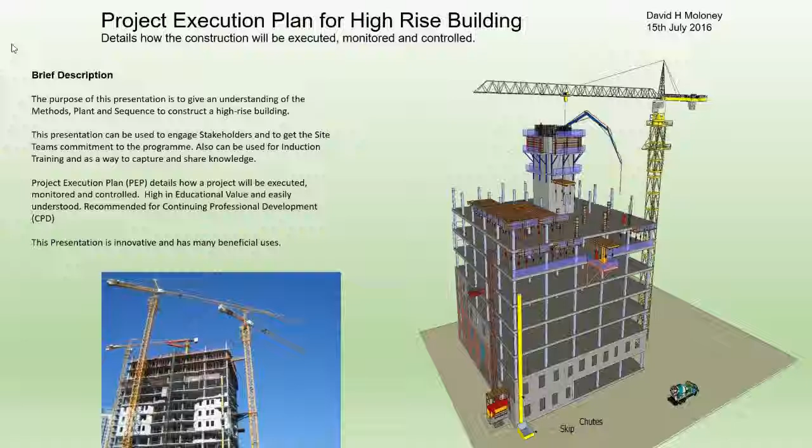Project execution plan for high-rise building. This project execution plan details how a high-rise building is constructed, and how the construction is monitored and controlled.

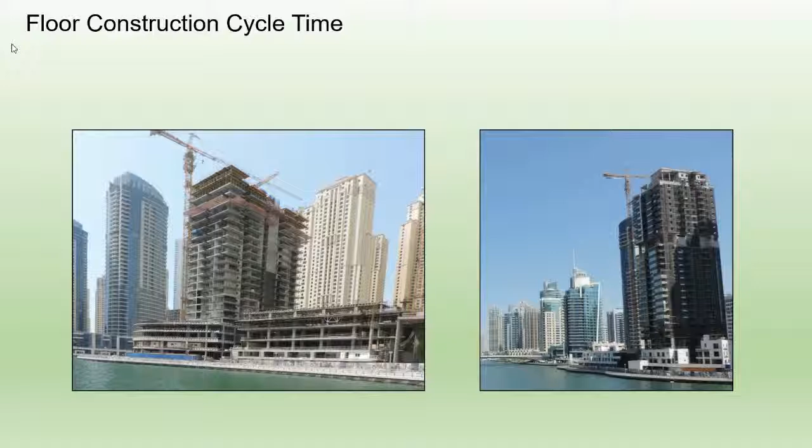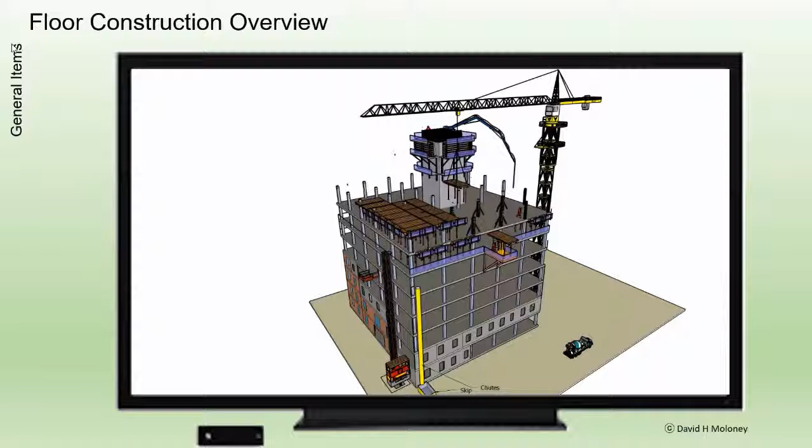Floor construction. Cycle times and program. The floor construction cycle time is 7 working days. Formwork types.

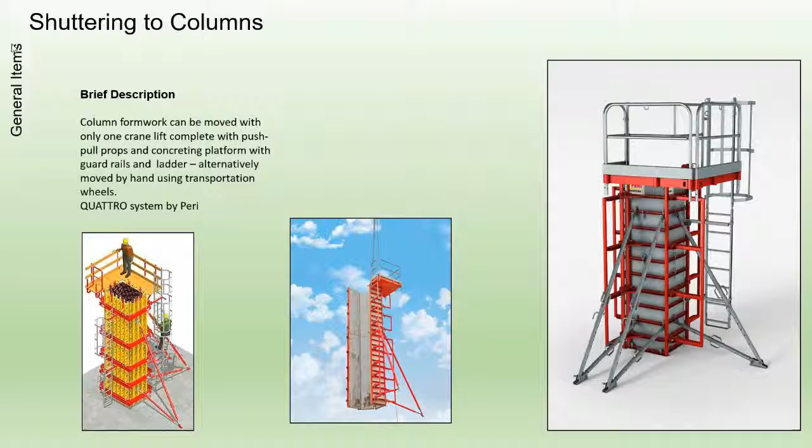Columns. Column formwork can be moved with only one crane lift, complete with push-pull props and concreting platform with guardrails and ladder. Alternatively, can be moved by hand using transportation wheels.

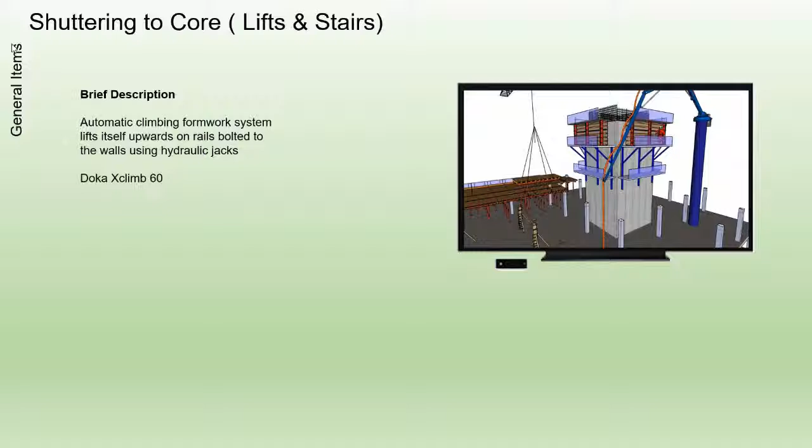Core walls. Climbing formwork system lifts itself upwards on rails bolted to the walls using hydraulic jacks.

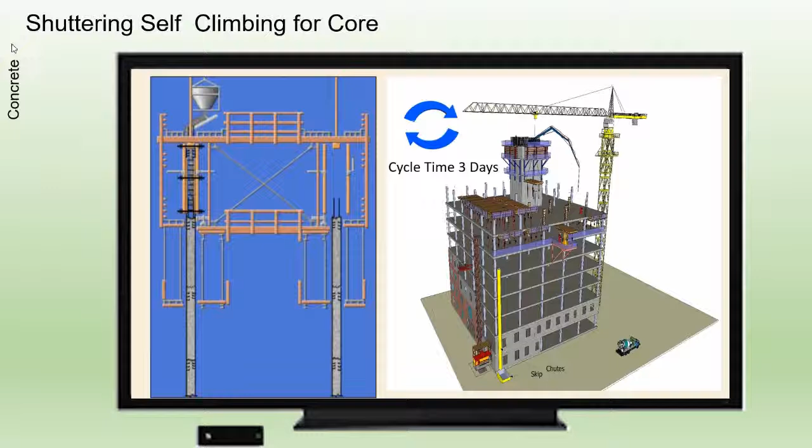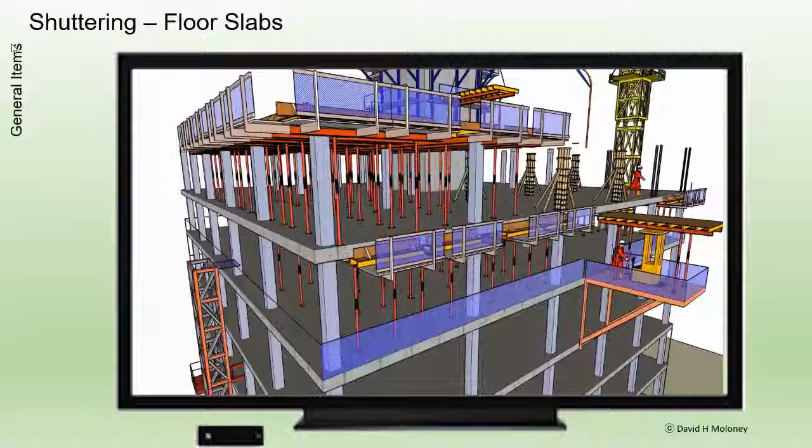Floor slabs. Table forms are pre-assembled formwork and falsework units that are moved horizontally on wheels or with a trolley and moved vertically from floor to floor by crane or by a lift fixed to the outside of the building. Formwork for stairs.

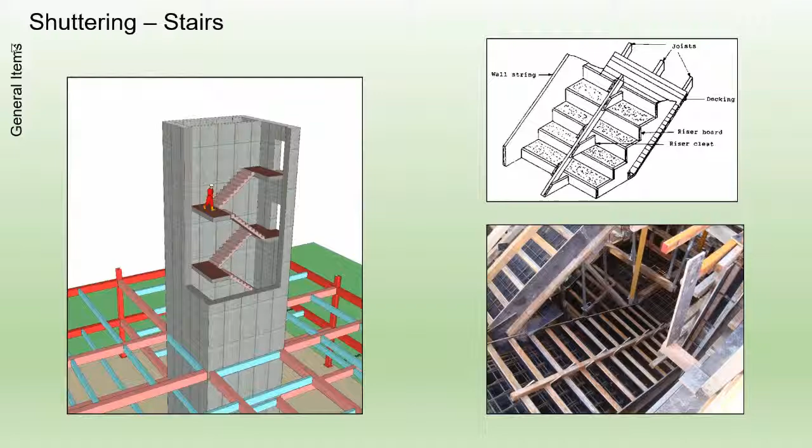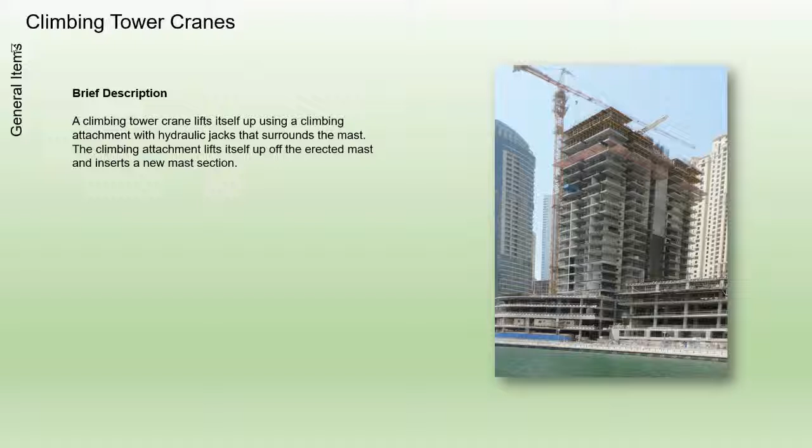Main construction equipment and plant. Tower cranes. A climbing tower crane lifts itself up using a climbing attachment with hydraulic jacks that surrounds the mast. The climbing attachment lifts itself and the top of the crane up, off the erected mast and inserts a new mast section. Above a certain height, the crane mast is anchored to the building using tie collars.

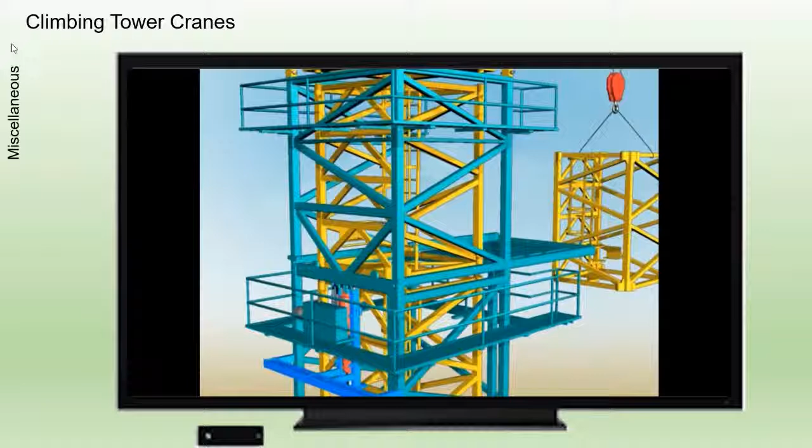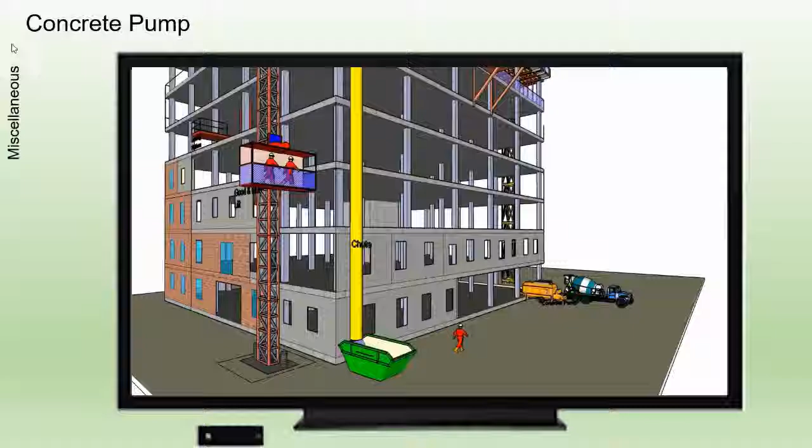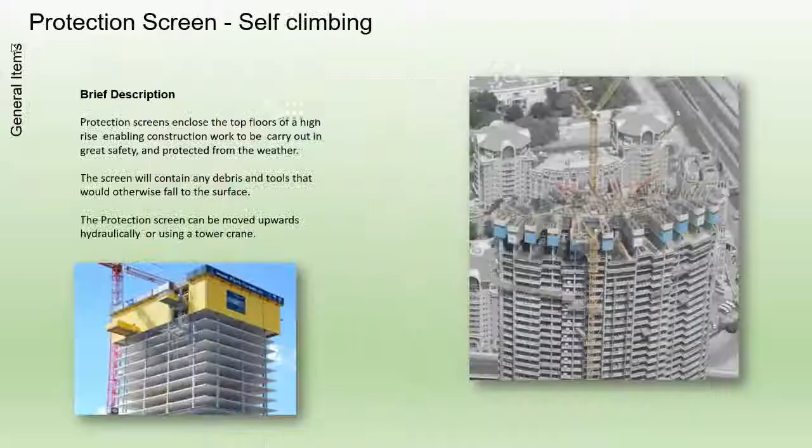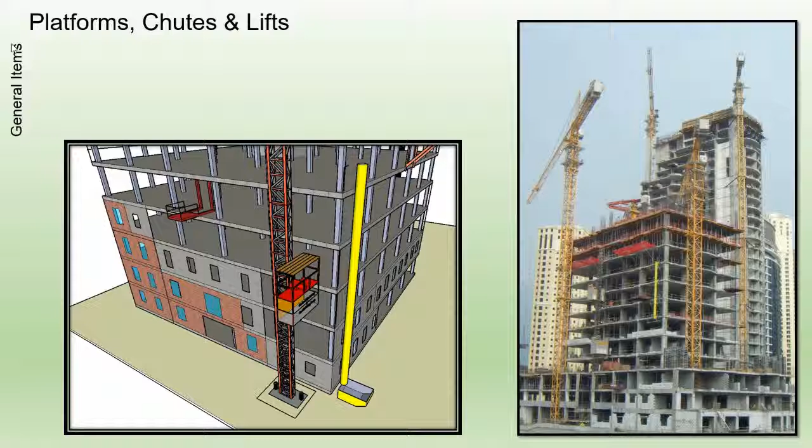Platforms, chutes and lifts. Cantilever loading platforms are used to move materials on and off floors with a tower crane. Chutes are used to move waste from various floors to skips at ground level. Passenger and goods lifts are used to move workers and materials and equipment vertically.

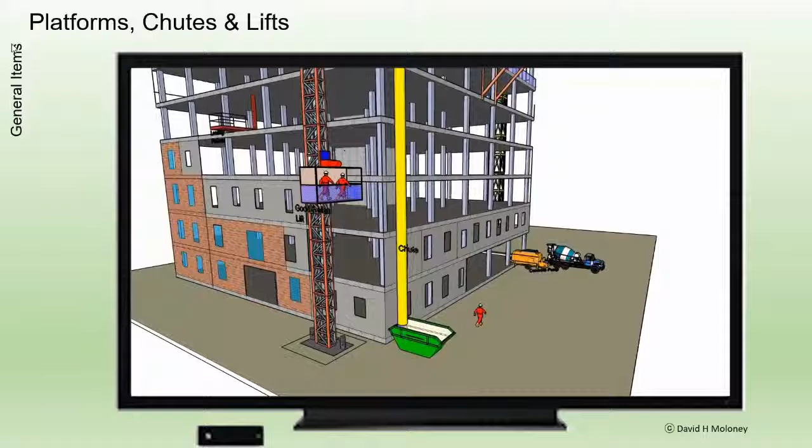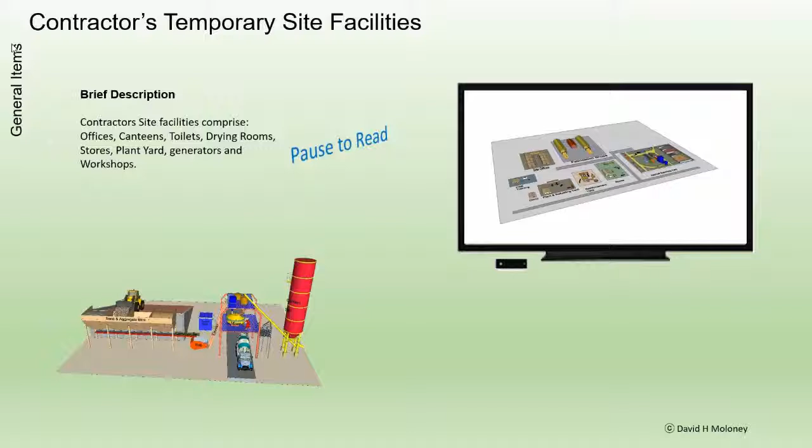Contractors' site facilities. Contractors' site facilities comprise offices, canteens, toilets, drying rooms, stores, plant yard, generators, and workshops.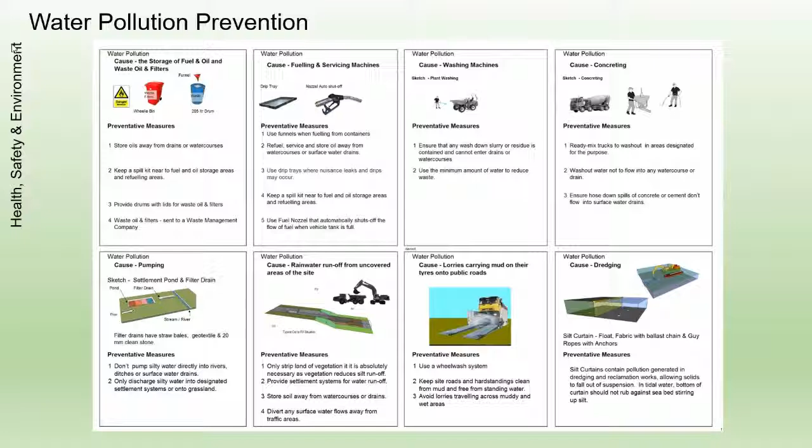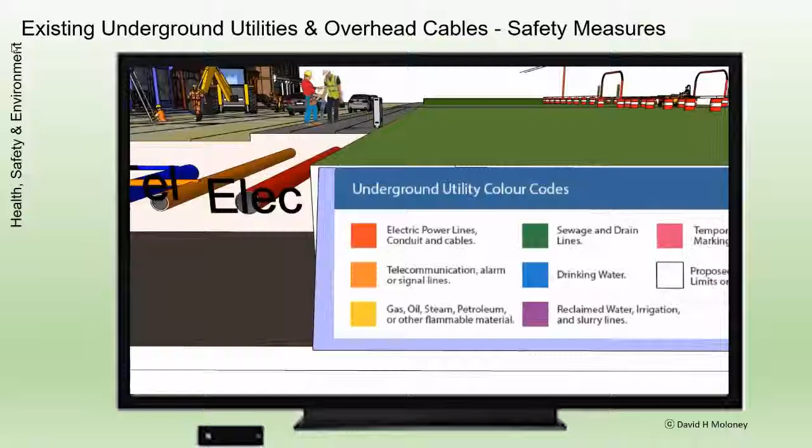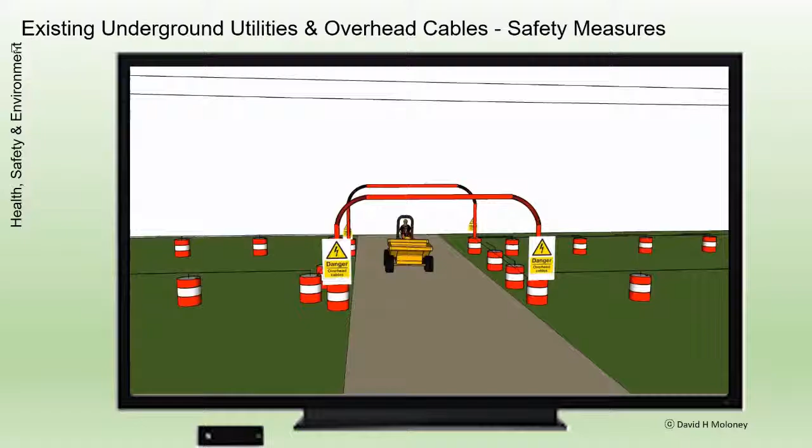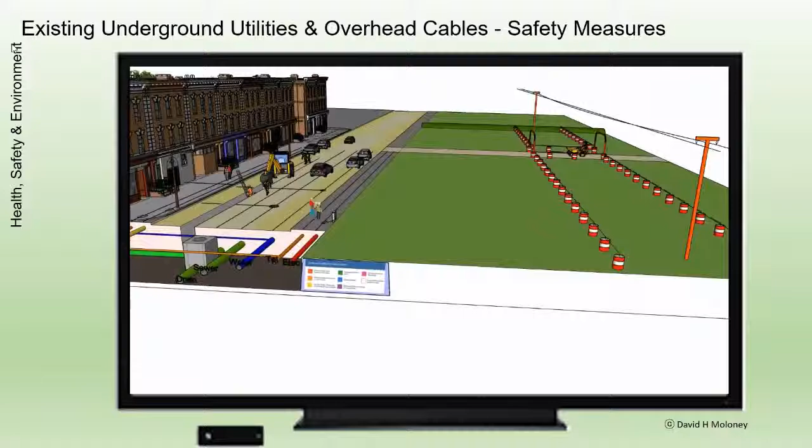Excavation safety. Before digging, establish the location and route of underground utilities. Measures when crossing under overhead cables. Safety measures for trench excavation.

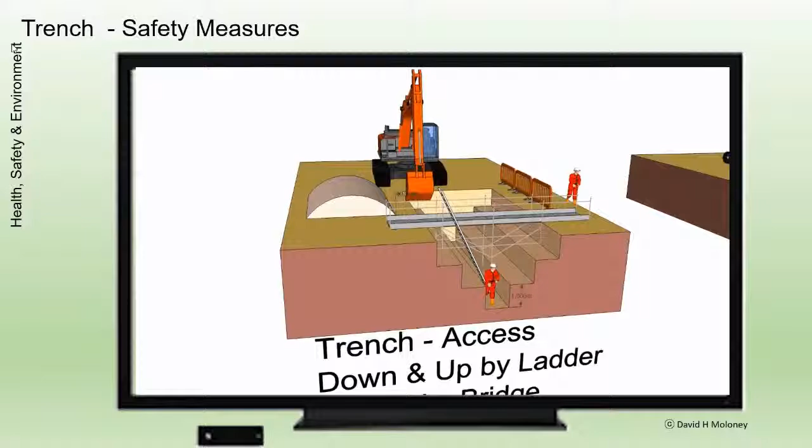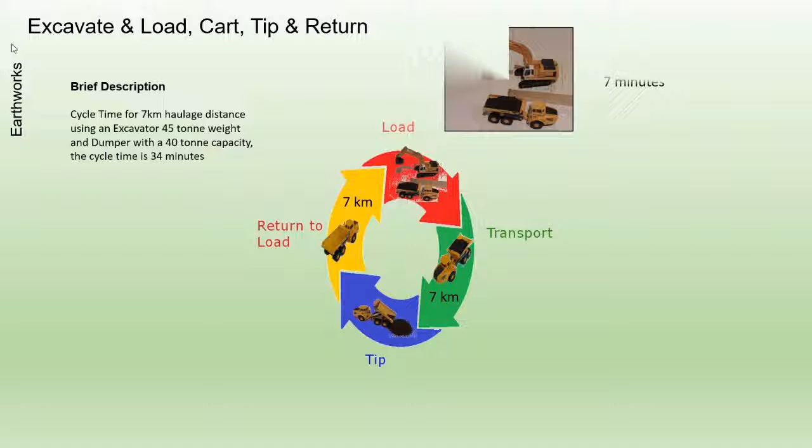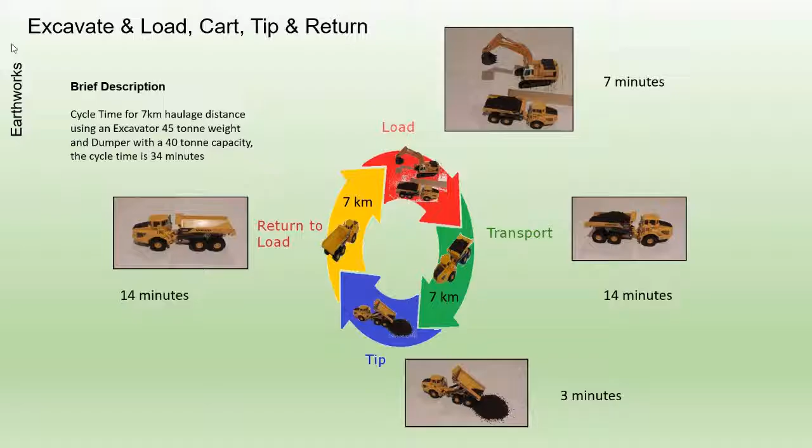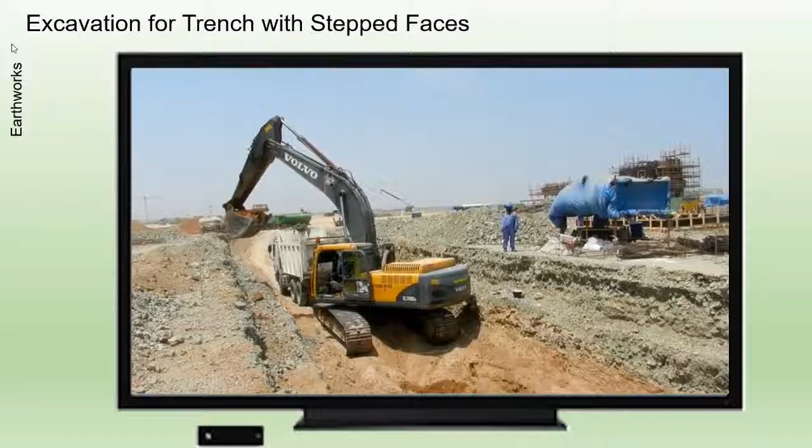Earthworks. Muck shifting cycle times. Excavation of trench with stepped faces. Excavation of trench with sloping faces.

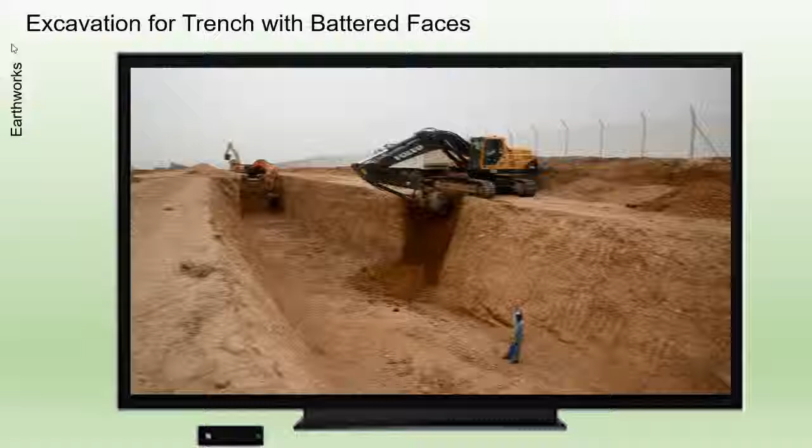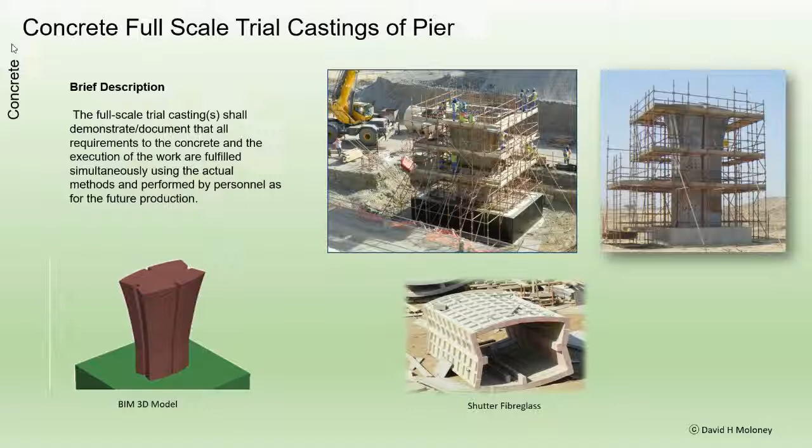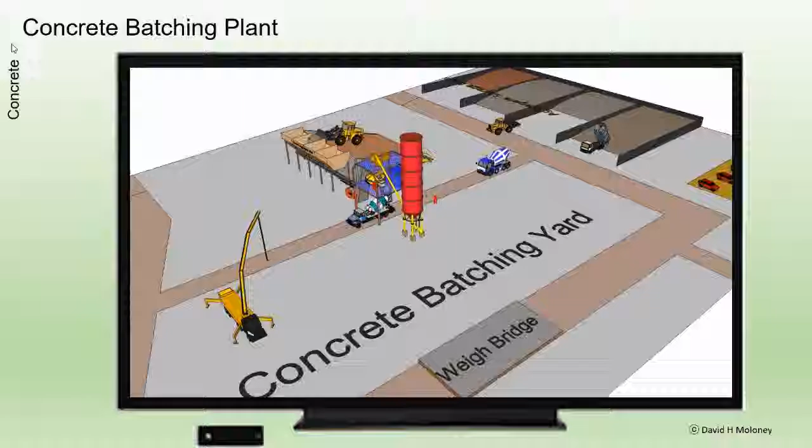Concrete, reinforcement and shuttering. Pre-construction. The full-scale trial concrete castings shall demonstrate and document that all the requirements for the concrete and the execution of the work are fulfilled simultaneously using the actual methods and performed by personnel as for the future production.

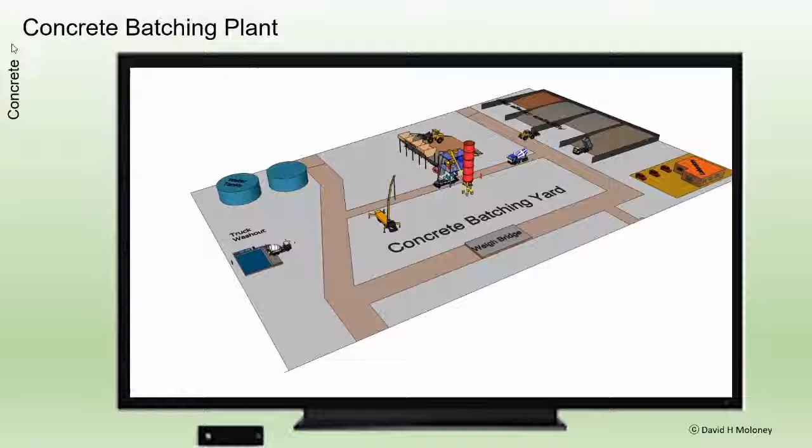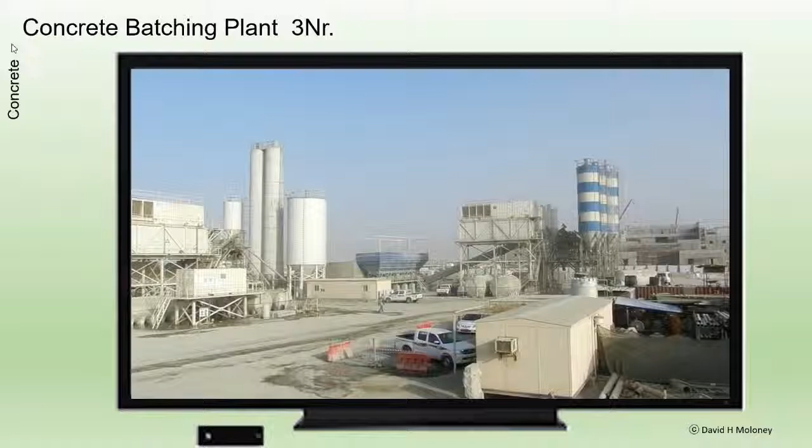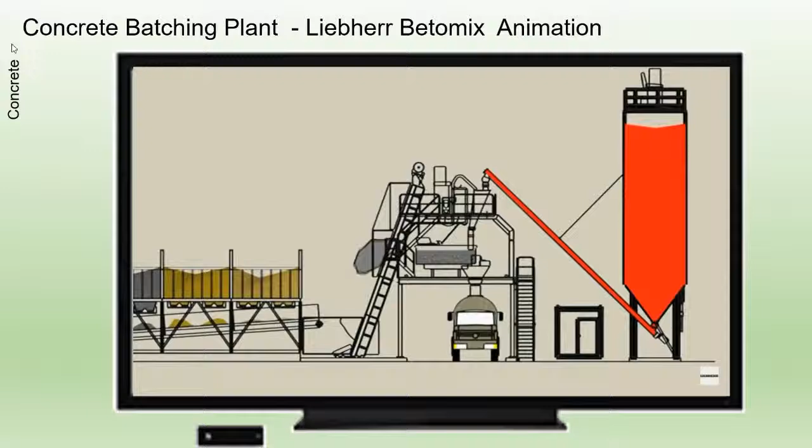Batching plant. Concrete batching plant comprises concrete mixer, control cabin, silos for cement and fly ash, aggregate bins, and conveyor belt system to feed the mixer. Also aggregate storage bays and water storage tanks. The mixing is computer controlled and has a dynamic screen display, showing the process. The material storage capacity is to match 2 days concrete production. Sample concrete mix.

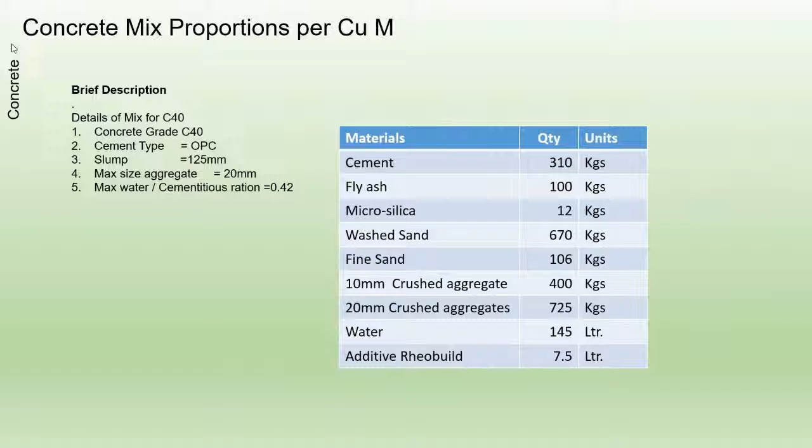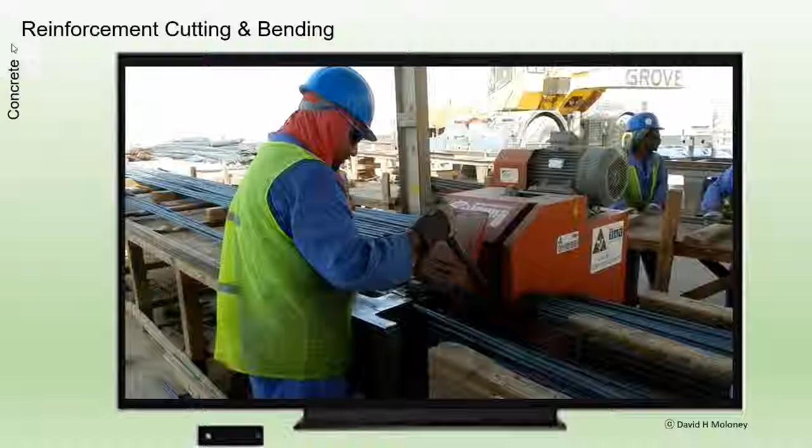Reinforcement cutting and bending. Reinforcement in 12 meter lengths are delivered in 3-ton bundles. The bars are cut and bent to the required shapes.

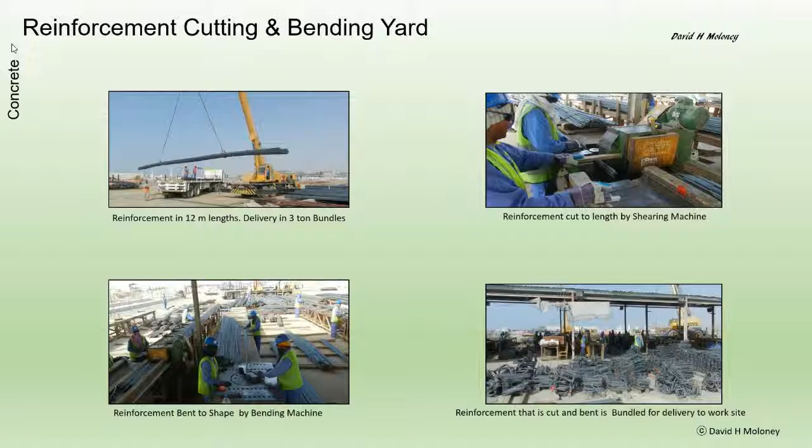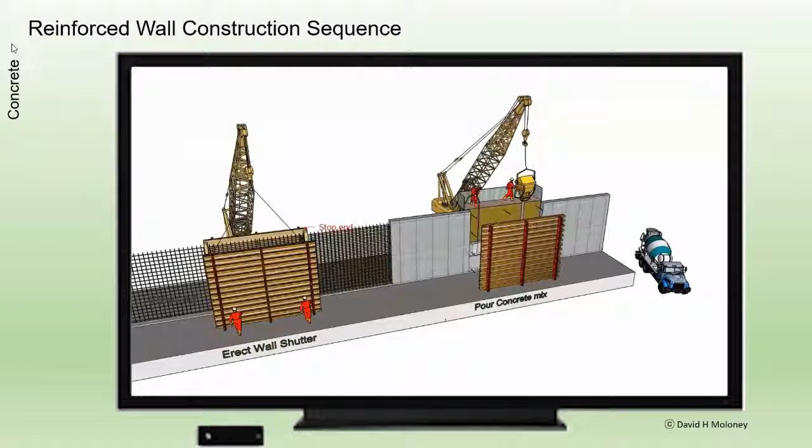Concrete wall construction. The sequence to construct a reinforced concrete wall is as follows. Tie the reinforcement. Erect stop ends and the wall shutters. Pour and vibrate the concrete mix. Remove the shutters after the concrete has hardened. Vibrators are used to compact the concrete.

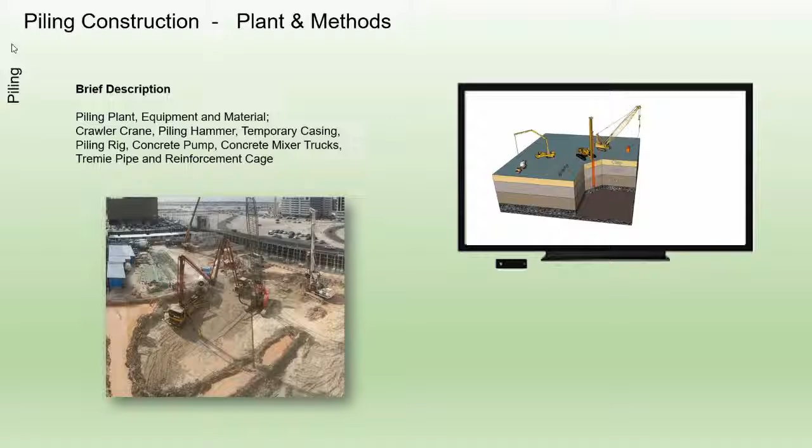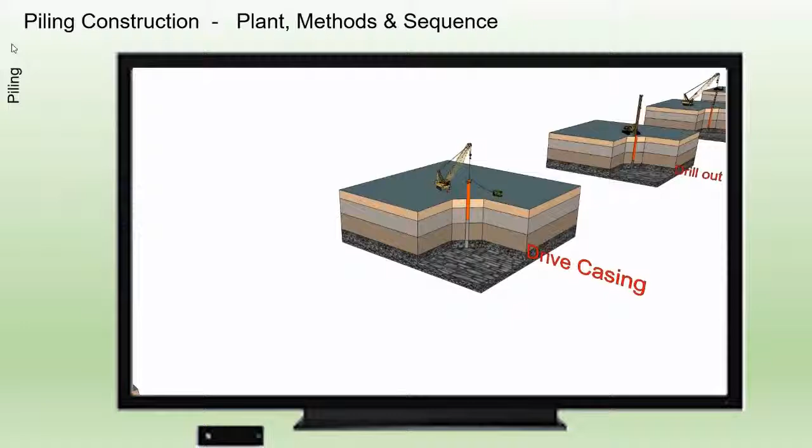Piling. Bored in situ piles. Piling plant, equipment, and material: crawler crane, piling hammer, temporary casing, piling rig, concrete pump, concrete mixer trucks, tremie pipe, and reinforcement cage. Shown is the piling construction sequence.

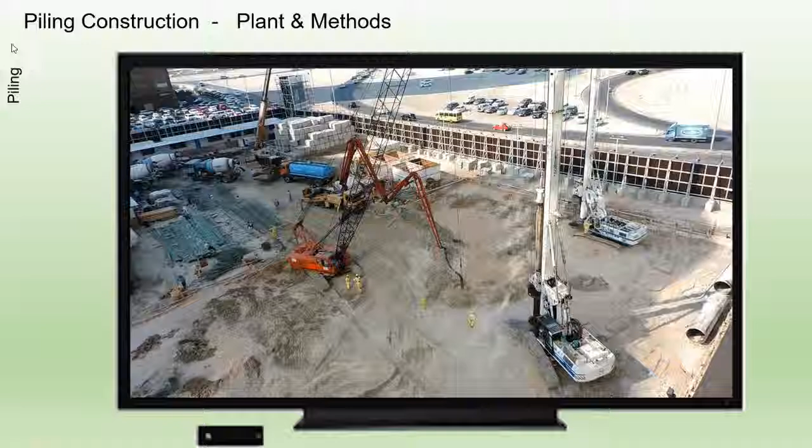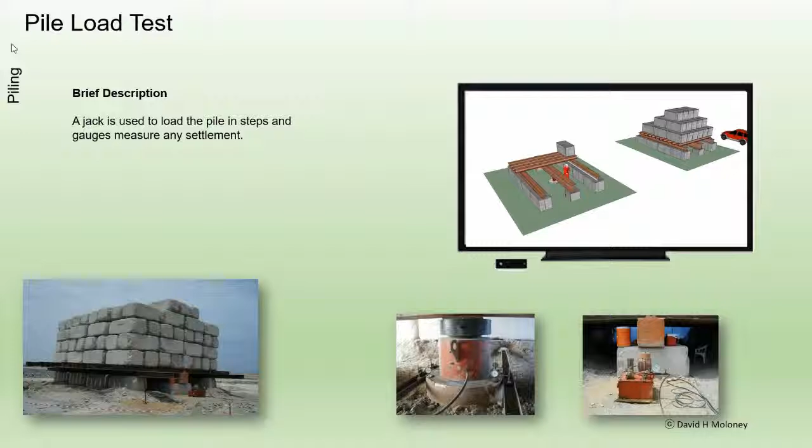Pile load test. A jack is used to load the pile in steps, and gauges measure any settlement.

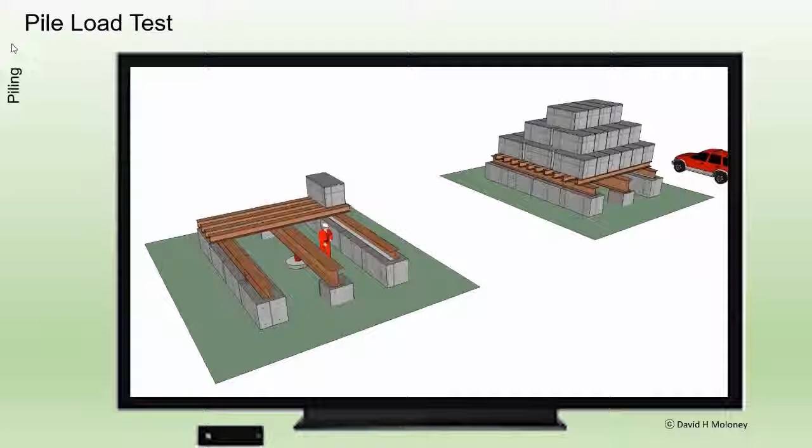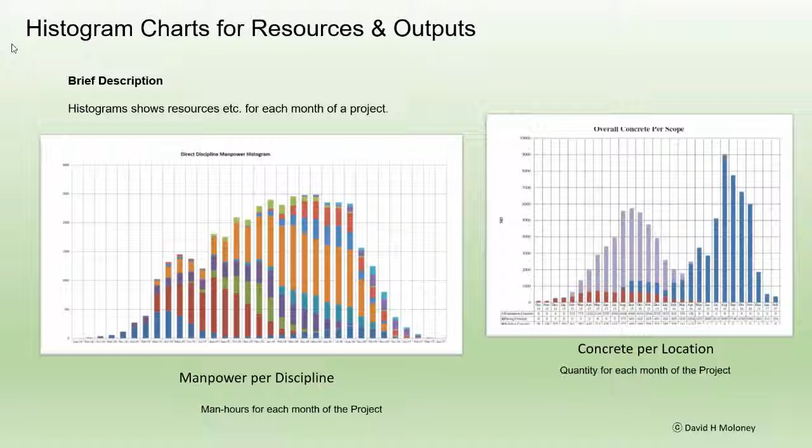Administration. Progress dashboard for monitoring and reporting. Histograms show resources and outputs for each month of a project. Resources, plant and manpower list. Daily work record.